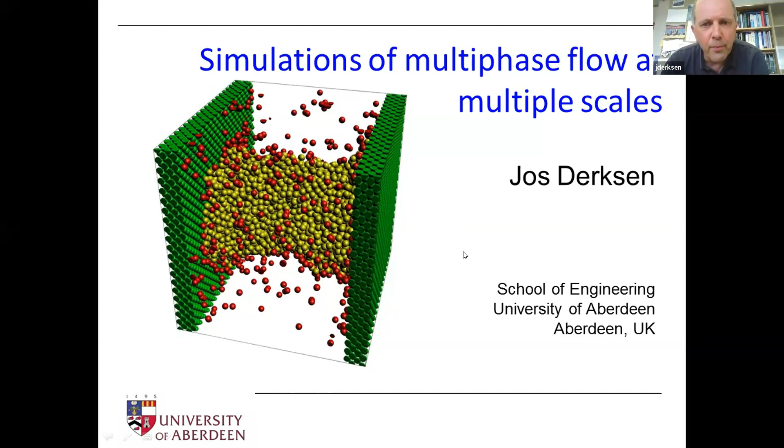Thanks very much for having me in this seminar series, which I very much appreciate. I'm going to talk about flow, maybe a bit besides the topic that you usually have in this seminar, but I still hope that this is interesting and a little bit entertaining as well. So again, simulations of multiphase flow at multiple scales.

I'm going to give some short motivation about what we consider multiphase flow dynamics, which is very broad, which includes things like blood flow, it includes sediment transport, it includes bubbly flow, so gas-liquid systems. We talk about emulsions as well, which are liquid mixtures, and the motivation is mainly in terms of chemical engineering processes.

So we're dealing with collective behavior of multiphase flow systems, and we want to understand how that collective behavior, how process performance depends on what happens at the scale of the particles, where particles we consider bubbles, droplets, solid particles, any dispersion inside a continuous system.

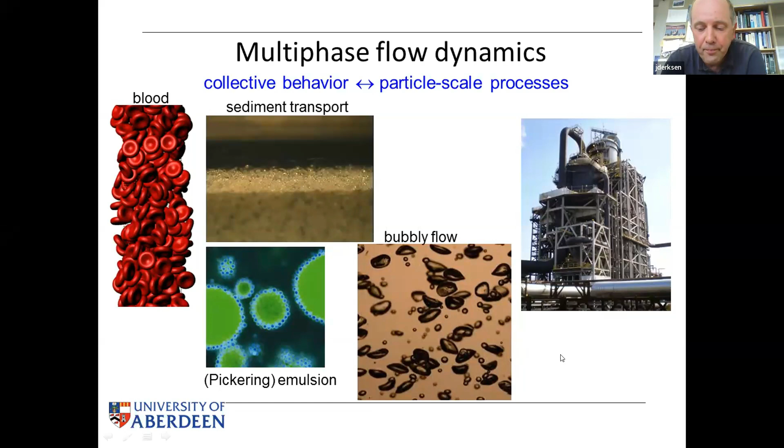Okay, so let me just start with a typical example just to set the stage. Let me take a very non-woke topic of enhanced oil recovery, but in a sense an interesting example about multiphase flow.

And we have translated this problem into a very simple idealized system. So what I'm trying to convince you of here is that we have a liquid 2, which would be the oil immersed into a continuous phase liquid 1, and we generate a flow. And the simplest way to generate a flow is to put a plate on top of the system and to shear the system so that we generate the shear rate that we call G.

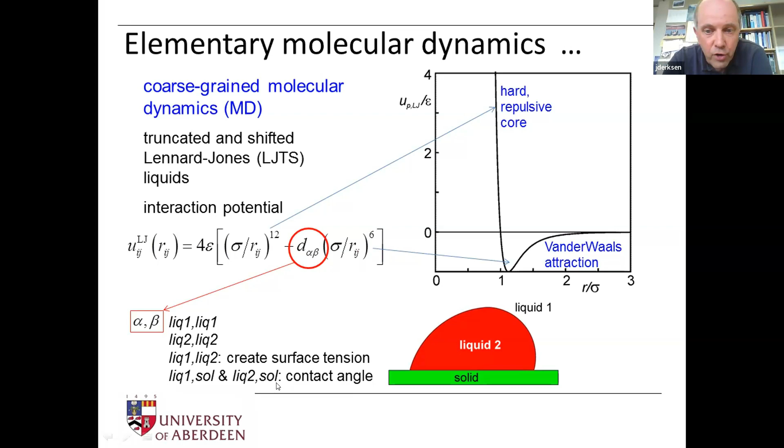All right. Then we do some calibrations in order to relate the interaction parameter d alpha beta to measurable quantities such as surface tension. In the upper part here, we try and convince you that the inside of the droplet has a higher pressure than the outside of the droplet, and this enables a calibration of the surface tension through the Young-Laplace equation.

In the lower part, we show that shearing the surface gives rise to a shear stress, and the shear stress gives rise to a viscosity as the ratio between shear stress and shear rate. And we can create droplets with different equilibrium contact angle by tweaking the interaction between the liquids, liquid 1 and liquid 2, and the solid surface.

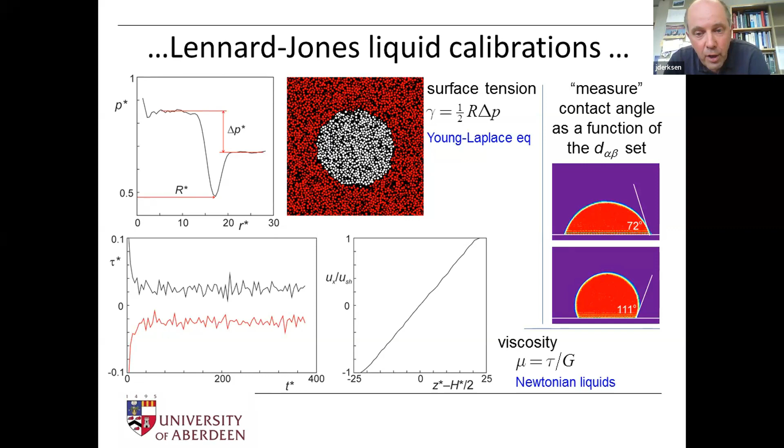All right, so we started from the Lennard-Jones potential. We used the interaction parameter d alpha beta to create contact angle and surface tension, and we have a viscosity, and then things look like this. So this is a brief animation where we start shearing the system. You see the droplet in white and the continuous phase liquid in red. The upper plate is moving in the right direction.

That motion creates a shear flow, and the droplet, I'm going to try and show that again, responds to that shear flow by not only deforming, but also seems to be sliding over the lower surface, which is actually standing still.

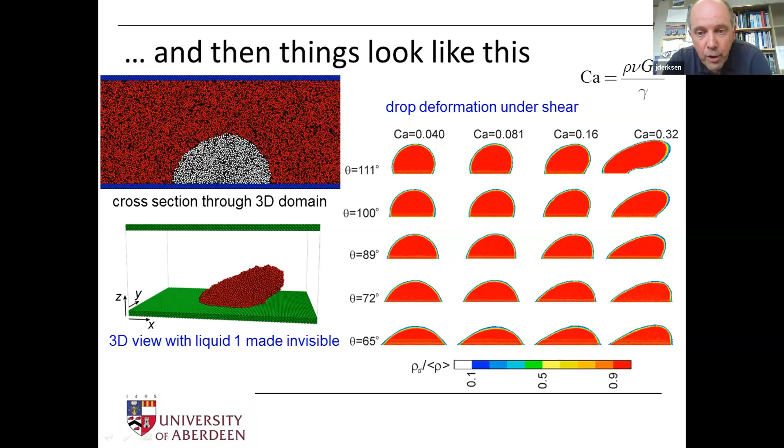We show more results on the further parts of the slide, where you can see that the deformation depends on the equilibrium contact angle; we see more deformation at higher contact angle, obviously. And if we increase the capillary number, which for the sake of argument would mean increasing the shear rate G in the system, we see stronger deformation for higher capillary number.

All right, then the question that we try to answer is, do the droplets slide? And the answer is yes. We can look at the footprint of a droplet. This is one example where we evolve in time from top to bottom, and you see a sliding of the droplet over the substrate. And that sliding goes hand in hand with a deformation of the droplet.

What we then do is we plot the sliding velocity, the sliding speed, as a function of the capillary number and as a function of the equilibrium contact angle. Again, the capillary number is a measure for the shear that we apply, and we see a higher sliding speed for higher contact angles because the droplet is more exposed to the flow for higher contact angles, and we see an increase of the sliding speed with the capillary number.

One interesting thing here is that we can identify a linear regime. So for levels of the capillary number up to 0.4-ish, the sliding speed is proportional to the capillary number, or proportional to the shear rate. So if we zoom in on that linear regime, then we can define a dimensionless sliding speed: the sliding speed made dimensionless with the shear rate G and the radius of the droplet.

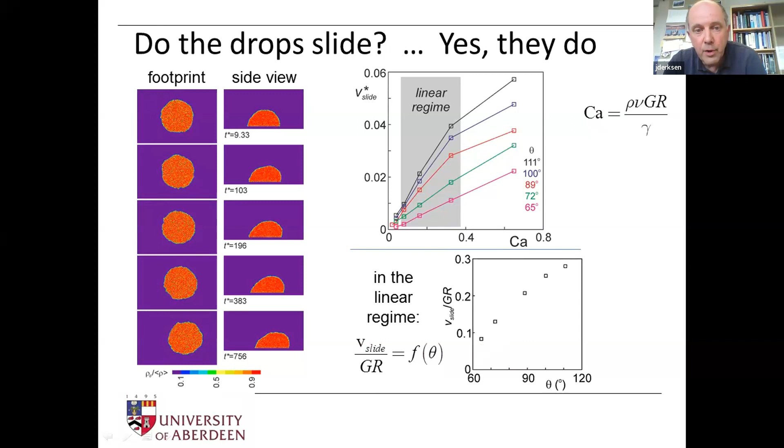Now, the question is, can we scale this up? Can we scale this up from a microscopic perspective, which is the coarse-grained molecular dynamics I have been showing, to a mesoscopic level? And for the mesoscopic level, one can use the Lattice-Boltzmann method. I'm not going to dwell much on the Lattice-Boltzmann method in this lecture. I would say that the Lattice-Boltzmann method is a particle-based way to do fluid dynamics.

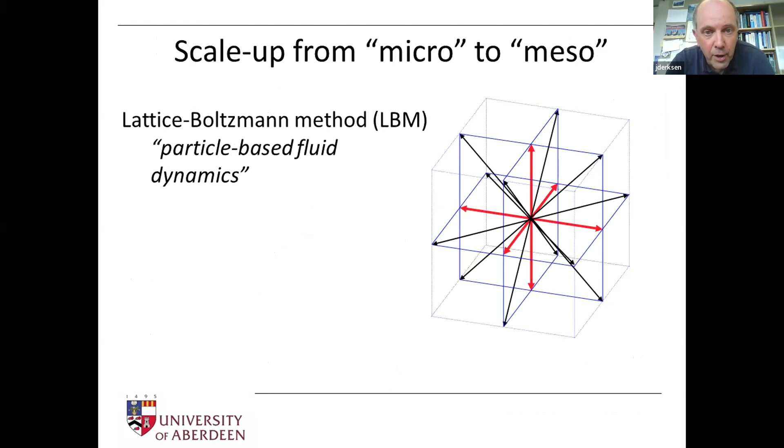Almost continuum, almost because still it is particle-based, an almost continuum way of doing fluid dynamics. Now, in the basic sense, the Lattice-Boltzmann method deals with single phase, only one fluid dynamics. We can, and there is lots of activity in this field, extend this Lattice-Boltzmann method to systems of immiscible liquids through phase field modeling and Cahn-Hilliard type of thermodynamics.

So what we do in multiphase, so two liquids, Lattice-Boltzmann method including phase fields, is we have an order parameter that is switching between, in this case, a -1 value, where we are in liquid 1. Remember the two liquids that we have, liquid 1 and liquid 2, red and purple, and it switches over a thin diffuse interface from liquid 1, phi is -1, to liquid 2, phi is 1. And that order parameter then satisfies an advection diffusion equation.

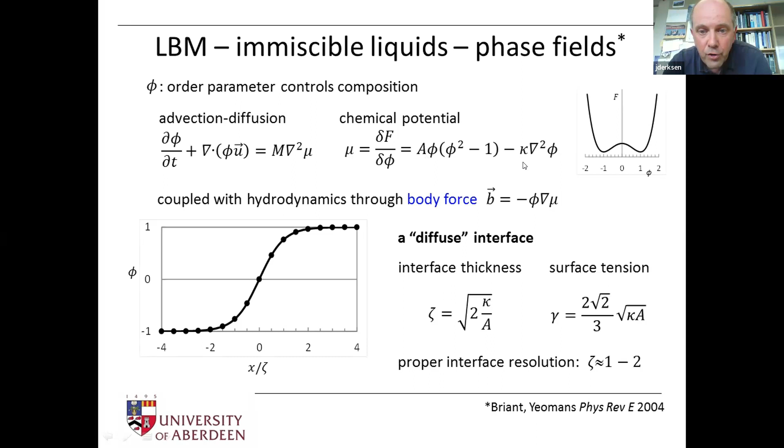The thermodynamics of the interface is brought in through a chemical potential and a free energy function that has two minima in the two different liquids. We then are able to create a certain interface thickness that we're going to call zeta, and the surface tension gamma related to the kappa and A parameters that are defined in the chemical potential. The A parameter is here, the kappa parameter is over there.

Now let's look at how we can do this sliding droplet problem in terms of a lattice-Boltzmann approach, and compare the lattice-Boltzmann approach with what we have achieved with the molecular dynamics simulation I showed you before. The system is defined here, and the devil actually is in the details. I want to focus on the three-phase contact lines. So the lines where the three phases, solid, liquid 2 and liquid 1, meet.

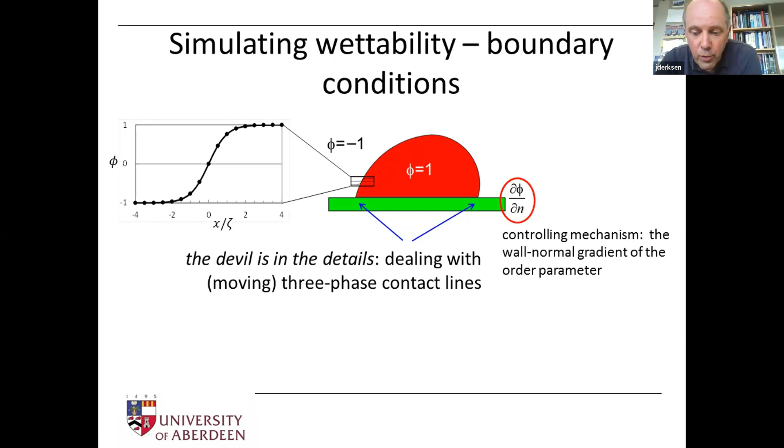And the contact line properties are brought in through the normal gradient to the wall of the phase field parameter. Now, what can we do in this respect? It is well established how to deal with an equilibrium droplet. We can achieve a certain contact angle through equilibrium boundary conditions. So we have different equations from different literature sources that describe the gradient of the phase field parameter in the normal direction based on the kappa and A parameters and the desired equilibrium contact angle.

We apply that equilibrium boundary condition contact angle, and we do again the sliding droplet simulation, the sheared droplet simulation, and the result would look something like this. So again, I'm going to show this again after it has finished. So what we do here is we start an equilibrium droplet, we shear the upper wall, we keep the lower wall fixed, and we see sliding behavior of the droplet based on a multi-phase lattice-Boltzmann simulation.

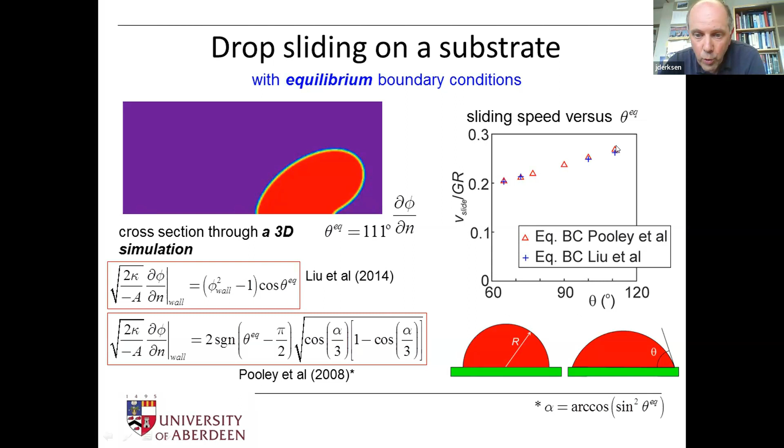Now, we can do the same thing. We can define a dimensionless sliding speed, the sliding speed of the droplet made dimensionless with the shear rate and the radius of the droplet, and we can plot that as a function of the equilibrium contact angle. And we see an increase of the dimensionless sliding speed with the equilibrium contact angle. We have here two sets of symbols that relate to two different types of equilibrium boundary conditions. They overlap very well. However, you can see that they poorly match the molecular dynamics results.

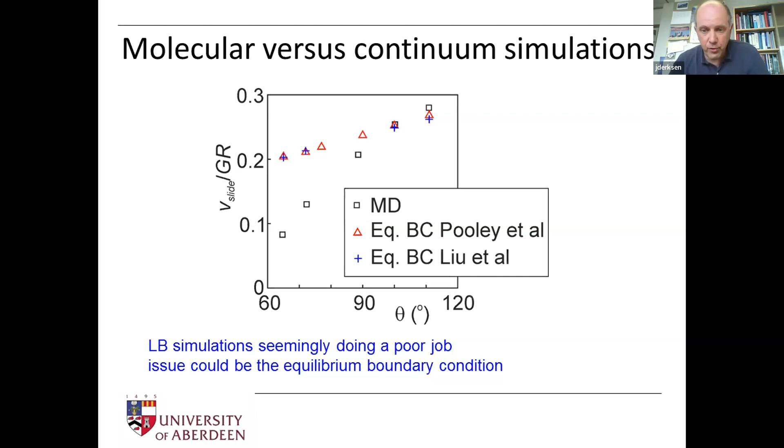So here I plot the lattice-Boltzmann results with the two different boundary conditions for the order parameter combined with the molecular dynamics results, these are the black symbols, where the sliding speed is very much lower for lower contact angles, and only at higher contact angles there is some agreement between the lattice-Boltzmann simulations and the molecular dynamics simulation. So the obvious thing to now think is, why would we use an equilibrium contact angle boundary condition in a clearly non-equilibrium situation?

So we have been investigating further based on a non-equilibrium boundary condition for the normal of the order parameter. In this paper of 2011, there is a proposal for a boundary condition that looks like this. It now involves the development of the order parameter with time, and it involves a parameter dw or dw star. dw is the dimensionless counterpart of dw star, with the problem that this parameter dw is unknown. We don't have clear theory, at least I'm not aware of clear theory, when it comes to determining the parameter in the non-equilibrium part of the contact angle boundary condition.

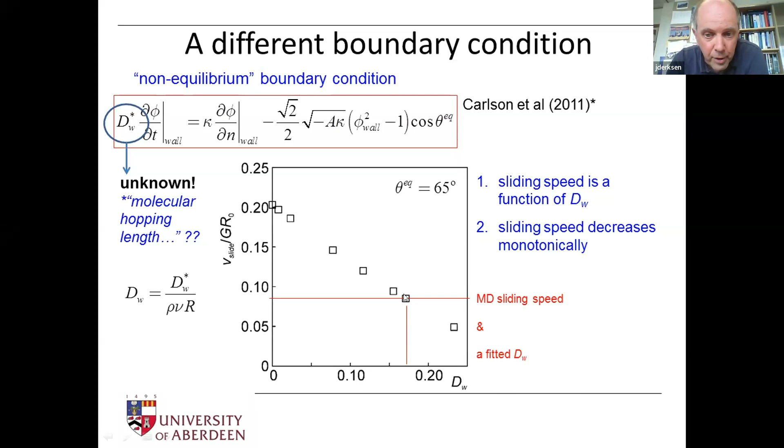So what we need to do, and this is an open question as far as I'm concerned, is we need to come up with some explanation or some theory on how to choose the non-equilibrium part in the contact angle boundary condition for LBM simulations. All right, so this was an example of how to combine lattice-Boltzmann simulations and MD simulations to get some understanding of multi-phase systems, in this case, liquid-liquid systems.

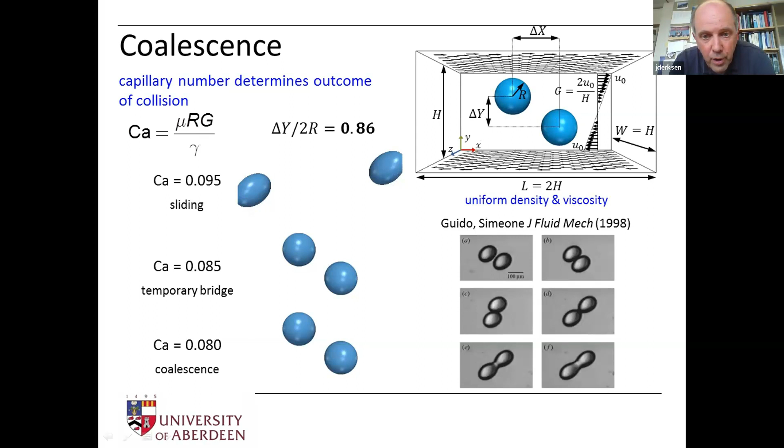So it is time to think a little bit about length scales at this stage, because I have only been talking about capillary numbers and contact angles, that is dimensionless quantities; it is useful to think about how big these droplets actually are. We don't know, but there is experimental evidence out there that critical film thicknesses in liquid droplet coalescence are of the order of 30 nanometers. So if the film gets thinner than 30 nanometers, it ruptures and two droplets will coalesce.

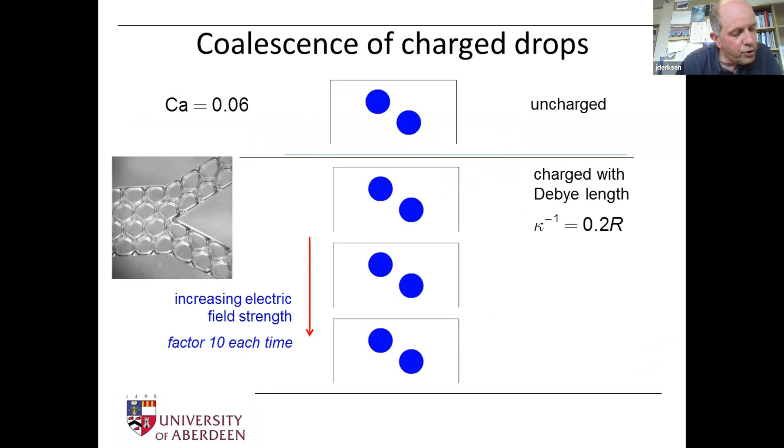All right, I'm going to skip over charged droplets because I'm running a bit slow. So let me remind you of the narrative that I tried to give you. I started talking about multi-phase flow, then I talked about liquid-liquid systems on substrates, molecular dynamics, and Lattice-Boltzmann methods. Then I talked about immiscible liquids. So now we're back at multi-phase flow, and the last 10 or so minutes, I would like to talk about solid fluid mixtures. So instead of liquid-liquid mixtures, solid fluid mixtures.

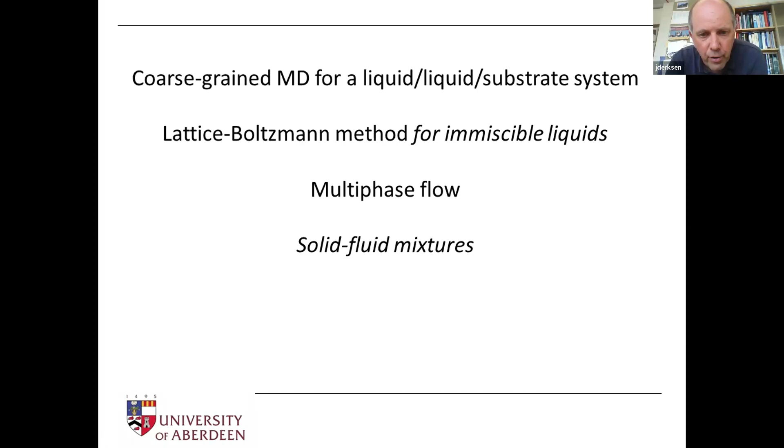And one of the motivations here is fluidization. Many chemical processes for contacting solid and liquid or solid and gas use fluidization units, which can be huge, meters, tens of meters size units. Their operation is very simple. What people do is they put fine particles, powders in a gas flow or a liquid flow. They make an upward fluid flow, and in that way they have intensive contact between solid and gas or solid and liquid. And fluidization, if you think about it, is pretty much the same as sedimentation, only a different perspective.

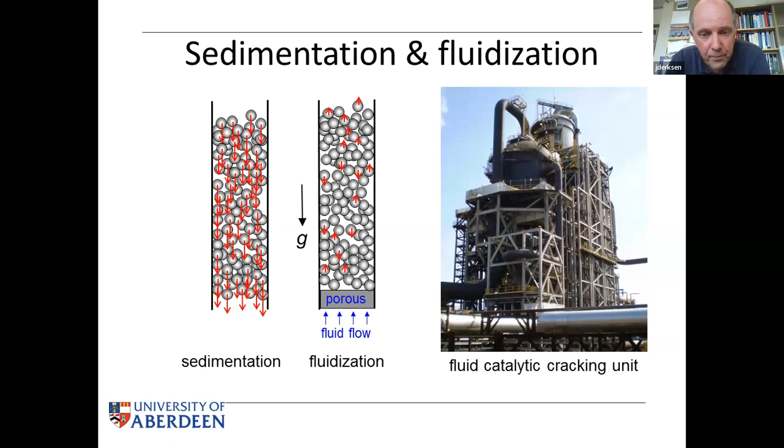Structures in solid fluid flows are intriguing. You almost never have homogeneous solid fluid flow. Unless the particles are very fine, they always form complicated structures. And these are at 3 levels of enlargement. These are experimental movies, courtesy of the National Energy Technology Lab. This shows the complexity of fluidized solid gas systems.

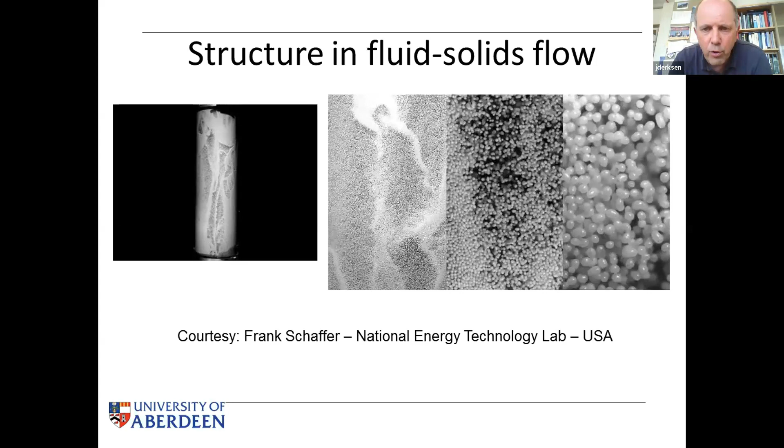And we want to mimic this sort of behavior. We want to understand, we want to mimic this sort of behavior at the microscopic scale. So at the finest scale we see here, we want to be able to simulate the interaction between fluid and solid at the scale of the particles.

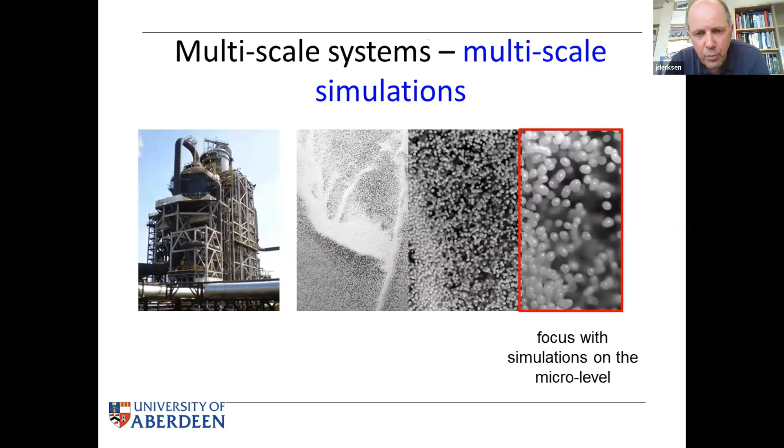That works quite well. So what I'm showing here is an example of an experimental system where you can see here the individual particles. These are motion blurred particles because the speed is relatively high here. And what you see here is that the system creates voids, so open spaces that are almost void of particles. And if you look carefully, you see a zigzagging motion of these voids.

And these we can mimic quite well in a detailed simulation. So you see here the same void, only one void, given the size of the system, meandering through the fluidized bed with conditions, that is density of particles and liquid and viscosity of the liquid, very comparable to the experimental picture.

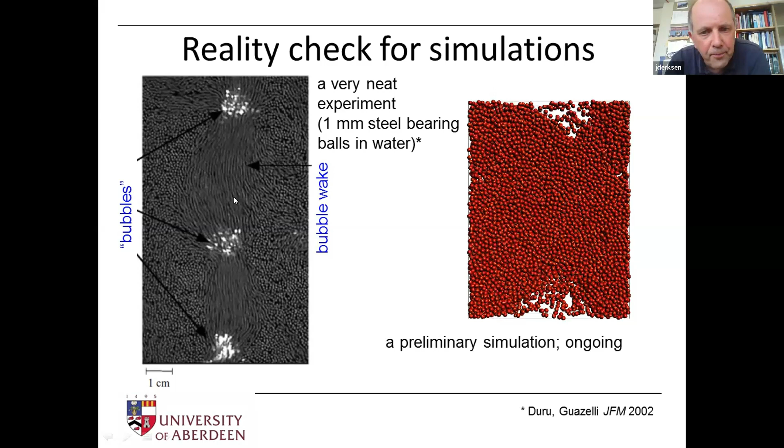So I won't dwell very much on how we do these simulations. The important message that I want to give is that we do what's called particle resolved simulation. So the computational mesh on which we resolve the fluid flow, we make it finer by at least one order of magnitude than the size of the particles. It means that we don't need strong modeling of forces on particles. We actually resolve most of the forces and torques on the particles.

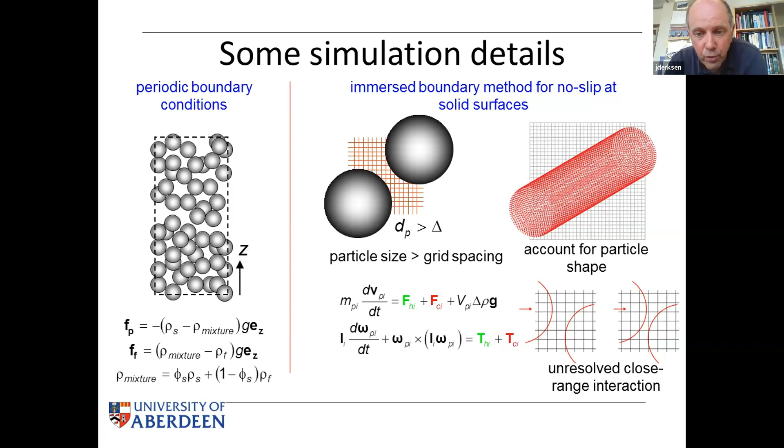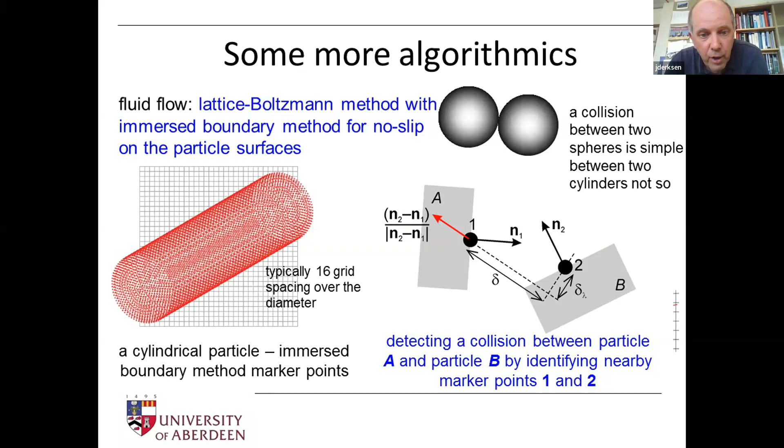And such an approach allows for changing the shape of particles. Since we resolve the no-slip condition at the surface of the particle, we can resolve the no-slip condition on particles of shape different than the usual spheres that people do simulations about. Some painful algorithmic issues relate to collisions between particles. We use quaternions, which molecular dynamics people know very well, in order to keep track of orientation of particles.

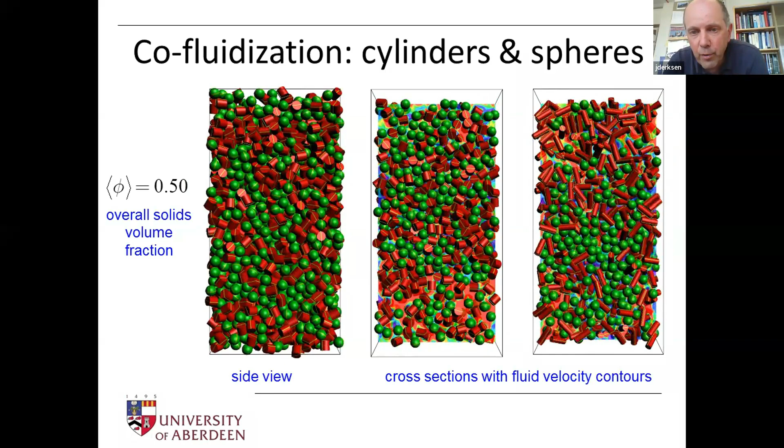And I'm going to show you quickly some results on fluidization with cylindrical and spherical particles, where I'm comparing here the side view of a fully periodic fluidized system with a cross-section, which shows the strength of numerical simulations: you are able to really look into the system and see an instability occurring here in this mixture of spherical and cylindrical particles. And that structure disappears largely when we change the aspect ratio of the cylindrical particles. So the same volume per cylindrical particle, but a higher aspect ratio.

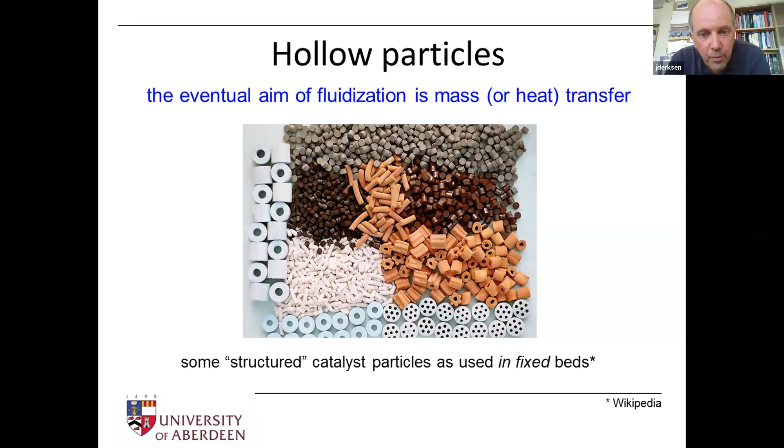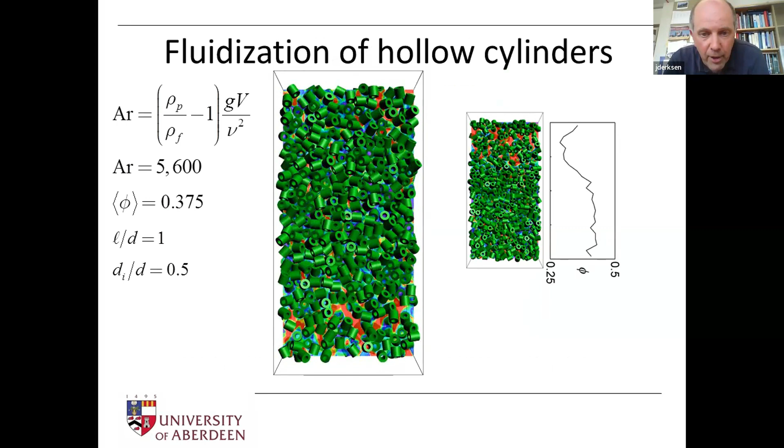Finally, I want to talk about hollow particles, because hollow particles are used in structured catalysts to enhance mass transfer. So what we did is fluidization simulations of hollow particles, and if you resolve the particles, that works in theory. And then the interesting thing is, can we determine the mass transfer inside these hollow particles? We can determine the flow inside the hollow particles.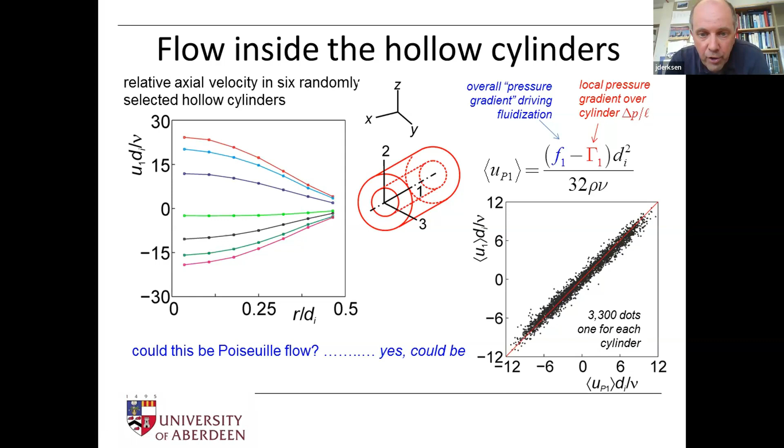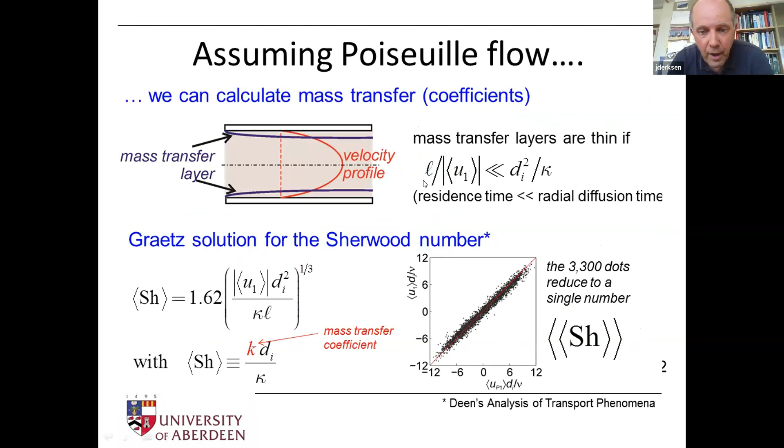It looks like a Poiseuille flow inside the particles that goes in different directions dependent on the orientation of the particle relative to gravity. And if we assume Poiseuille flow inside a pipe, inside a cylinder, we can determine the mass transfer coefficient through what's called Graetz solutions for the Sherwood number, where the Sherwood number is the dimensionless mass transfer coefficient. I'm not going to dwell on this very much because I'm really running out of time. The final result is an average Sherwood number of a fluidized bed as a function of the Archimedes number, being a measure for the strength of fluidization.

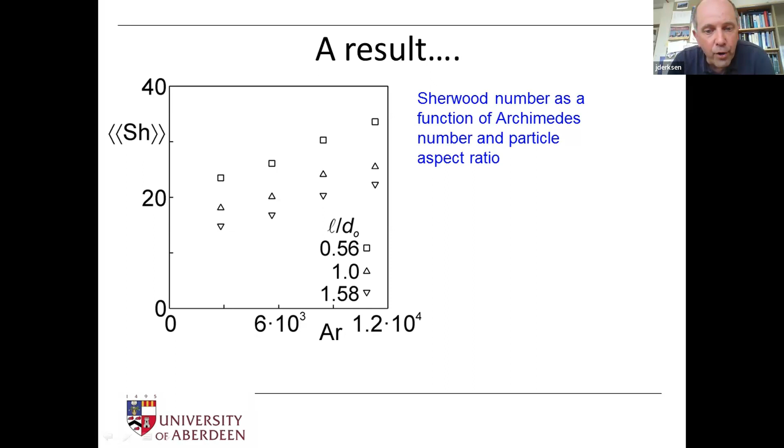And in general, I did not show much experimental work other than from literature. I think it is very important to ground simulation work in experimental validation.